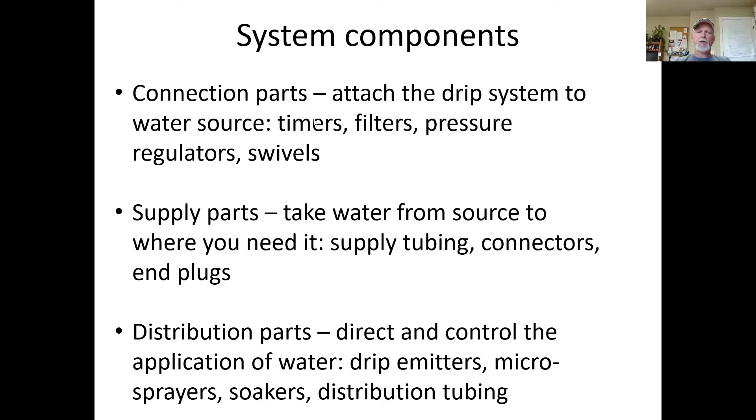So when you're doing your connection to your water source, there are some basic parts you just need to be kind of familiar with. You need some sort of a manual shutoff to give you ready control of the system if you need it. Typically, it's not ideal to hook it directly up to the hose bib without something, and it can be as simple as a standard manual shutoff, plastic or metal shutoff that just threads right onto your hose bib.

Ideally, you should use some form of filtration on a drip system because small particles can gum up the works and give you problems. On city water on a small system, you might potentially be able to get away with none, but we still generally recommend it. There's just a lot of stuff that happens to get into the systems that can foul up the little tiny emitters on the far end, and then you don't realize something's not working right.

For most types of application, 150 micron filters work fine, and you can get filters that are designed to hook right up to the standard hose thread connection. If you're doing super low flow parts, like if you're doing a lot of the pre-emitted 1/4 inch soaker with really, really small emission points, you might want to go up to a 200 micron filter just to make sure. Or if you have a well that is notably sedimenty, you might want to put up a 200 micron filter just to ensure less problems. So the larger the number, the smaller the filter holes, the less stuff gets through.

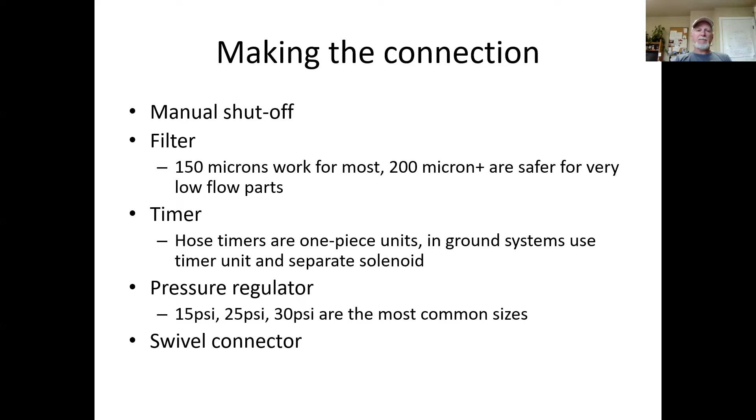And then once you've got all those connection pieces on, you need the actual connector, usually the swivel connector for a hose attached system, that converts from a standard threaded hose fixture like you're used to off of a hose or hose bib to a compression fitting that actually supplies the water to the 1/2-inch supply line. It does matter what order you are putting these components together in.

Typically, the first thing you want, of course, is your manual shut off. That gives you the ability to readily control the water, even without turning on and off the actual hose bib itself. Even in-ground systems on fancy timers that are PVC solenoid and then a pop-up to get out, still have a manual shut off in case you need to, for example, work on the system. You don't want to go all the way back and drain the whole system out and shut it all off back at the street. So good idea to have one of those on. It's the first part of your attachment sequence.

The next part usually is your filter, because even the timers might have small parts that could fail if they get too much debris in them. Filter will simply protect the system from debris and fouling. Then your timer, if you're using one. The reason the timer goes next is kind of important. The pressure regulator comes after the timer.

And if you were to set up your system to where your pressure regulator came first and then your timer, you could have that pressure regulator fail. They're not designed to have a constant pressure against them the whole time, which is what happens when you have an on system. Anything behind the timer is constantly on at full hose pressure. If you put the pressure regulator before the timer, then usually within a couple of months, your pressure regulator starts leaking because it doesn't handle that pressure. It's not designed for that constant pressure against it all the time like that.

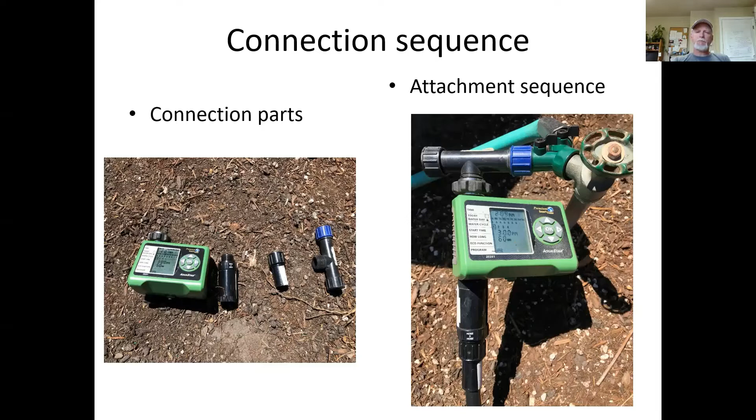So once you've got your connection made, now you need to get the water from the connection point out in the vicinity of the plants you want watered. And to do this, we use supply tubing. They usually call this half-inch tubing. That's a complete misnomer. In fact, if you go around and hit several different stores and look at several different brands, you'll see that there's actually a whole batch of different sized, quote unquote, half-inch tubing.

The most common dimensions: there's a little bit of actual true half, which is much smaller than you think. There's a lot of 0.620 inch and a lot of 0.7 inch. They call it 700 tube and 600 tube colloquially. The important thing is not for me to say, this is the size you need. The important thing is when you are buying system components, make a note of what kind of supply tubing, half-inch tubing, you are buying. Because parts from one will not fit parts of the other.

You can usually find parts for most of the common sizes out there if you do a little shopping around, but you can't go to a store, get a half-inch compression fitting and expect it to be usable on all the 4 or 5 or 6 different sizes that are commonly available. So make a note of that. 700 tubing is common, 620 tubing is common. Most other sizes are uncommon, but they do exist, they are out there.

It's important to understand that once we put that pressure regulator on, we have really changed the dynamics of water flow in the system. So once you have put that pressure regulator on, you have only so much footage of this half-inch supply tubing that you can run before the friction loss has pretty well balanced out any usable pressure in the system. The more times you put a T in it to split it off, and the more times you put an elbow in it to make a sharp right-hand turn, the less footage you can safely use, because that again affects the available pressure and water flow in the system.

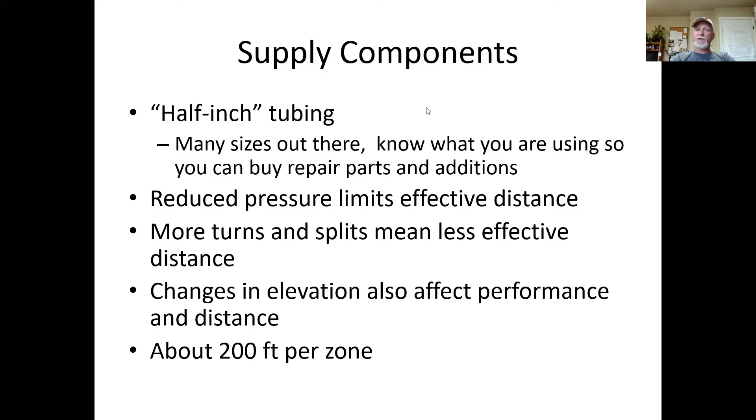So to maximize the efficiency of your supply components, try to avoid making right-hand turns. And if you're going up over the wall into a raised bed, or if you're going up a post to a deck rail and then going to go lateral, those pretty much have to be right-hand turns. You don't want loose, floppy tubing making those connections.

There are situations where you're coming around a house and maybe your pathway is right there at the corner of a house and you only have a few inches to make that. You probably are going to want to put an elbow on that to make that right-hand turn. There's reasons you have to do that sometimes, but the more you can avoid it, the better.

The trade-off to that is you can make a sharp enough slow curving turn to cause a crimp in that tubing. When you try to turn too far too fast, the tubing will actually crimp. It'll create a kind of a crease in it, and it'll fold over, and water no longer goes past that crease. And that obviously makes the system not work. So it's a balancing act. Where possible, slow curving turns. Where you have to, make right-hand turns, but try to avoid it.

When you're laying out a system, don't expect to stretch that tubing tight and nail it down to the ground with staples or anything of the sort. When water comes into a system that has air in it, and where there's very small release points, we get what we call a water hammer effect. And so that water surging through that system with the air trapped in it is going to create this knocking and shifting around.

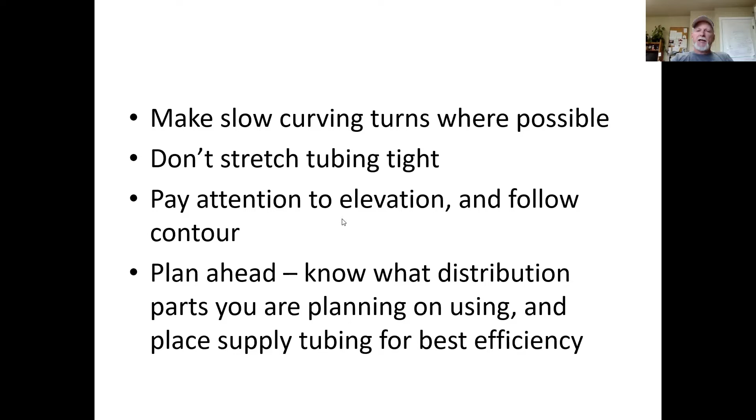So when it comes to distributing the water, actually applying the water, there's a whole batch of different ways you can get there from here. Basically, we break them down into 2 types of distribution parts. Low flow distribution components are things like individual drip emitters. They'll have flow rates of like 1/2 gallon per hour, 1 gallon per hour, maybe 2 gallons per hour.

Other components are high flow. These can be higher flow soakers. Some soakers are actually sprayer soakers or weep through soakers over a large area that take a fair amount of water. Others might be actual spray devices, which will have a rating of maybe 10 or 15 or even as much as 20 gallons per hour for the emission head.

So these are all useful components, but they shouldn't be mixed on the same timer zone. And yes, I know there are ways around it if you know what you're doing to sometimes make it kind of work. But generally, you should have separate zones for things that you're going to run on individual point source drippers or pre-emitted 1/4 inch soakers, because they're low flow devices. They're designed to run for long periods of time.

Higher flow devices run for shorter periods of time on purpose. And if you try to mix the two, you're going to do one of 2 things. You're going to dramatically underwater your point source emitters, or you're going to create standing water and runoff through your high flow emitters if you're trying to do both on the same system. So just plan a separate system for low flow stuff, a separate system for individual high flow situations.

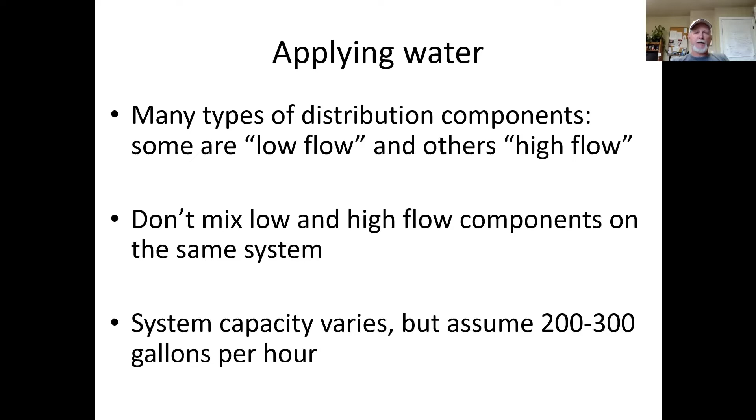The overall capacity in your system is somewhat variable. There's a variety of things that impact that, but you can generally assume that in a given zone, after pressure regulator at 25 or 30 PSI, you probably have something between 200 and 300, maybe at most 350 gallons per hour available. That becomes important with high flow components in particular. Even if you can fit as much tubing as you want to get where you want to go, if you're doing a lot of high flow components, you're rapidly going to run out of available water in that zone. So you may need to do multiple zones to make it work.

And it's an understanding that that is designed to water in basically a downward funnel-shaped pattern. If you're getting an inch of emitted water visible on the soil surface, when you get down there at 12 inches under the soil, that could be 1.5 feet or even 2 feet in diameter, depending on your soil profile and how much water you're actually putting into it. So it's watering a much bigger area and with much more water than you think. It's just going down. It's not sitting there on the soil surface, wetting the soil surface.

That's not to say that you don't necessarily need more flow or more emitters. Large plants, particularly plants with larger horizontal root systems rather than deep root systems, often need more than one emitter, because if you water a 2-foot circle over here, and the roots are 7 feet across, like on a big rhody, only one small section of the plant is actually getting water.

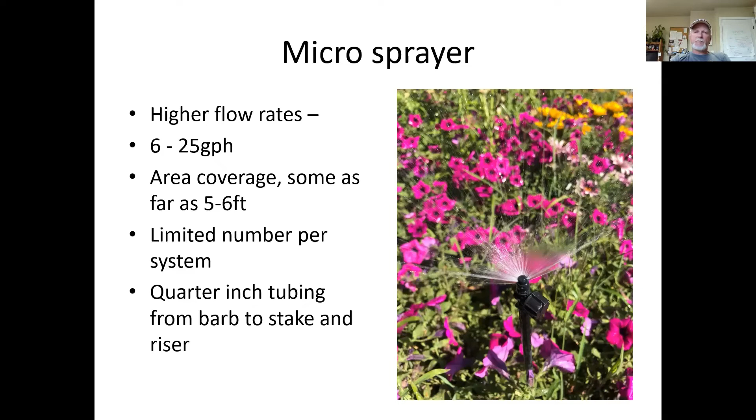Aluminum staples help hold tubing in the ground. It's going to be used for both 1/2 inch tubing and 1/4 inch distribution tubing. It just simply enables you to keep that tubing about where you want it, so it's not getting tripped over all the time or getting shifted by even passing animals or whatever, and no longer putting the water where you want it.

Shutoff valves are also available in both 1/2 inch and 1/4 inch components. This might be useful if there's parts of your system that you want to run seasonally, but the rest of it you want to run more frequently. And it simply enables you to turn part of the system off while the rest of the system continues to work on its regular timing.

Hole punches are in between essential and optional. You can do other means of attaching your drip components into your 1/2 inch tubing, but the hole punches are really well designed for doing that, and we'll demonstrate that here in a second.

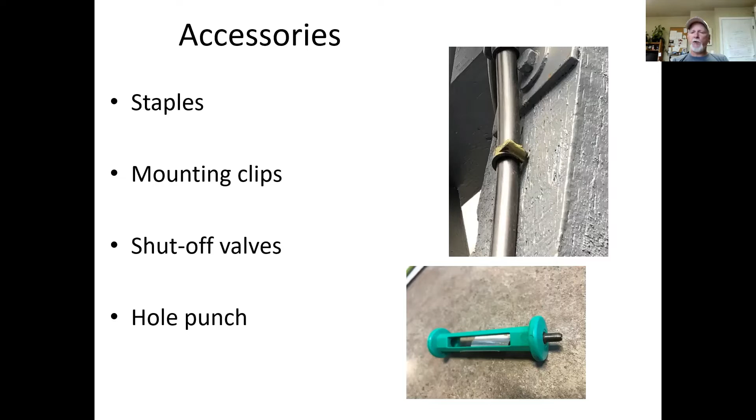Okay, we'll talk a little bit more now about layout and how this works, and then we'll go into showing the actual attachment sequences. I like to use what we call the 200-200 rule, and as I said a little while ago, it's a very conservative number. We assume you have about 200 linear feet of available tubing and about 200 gallons per hour of available water. You actually, in almost every system, will have more than that. That's a very conservative estimate.

Keep in mind that this is all measured after the pressure regulator. What happens after the pressure regulator is much more impactful on how the system works than what happens before. So for an example, a lot of my zones at home, I may not run 1/2 inch tubing all the way back to the hose bib at the house. Instead, I'll run a traditional garden hose out to the shut off and timer. So I've got 50 feet of garden hose at full pressure before I start my supply and distribution lines out there in the garden.

So this simply enables me to save that extra water loss I would have running that extra 50 feet of tubing, so I can have more tubing on the zones out there. So after the pressure regulator, that's when you start measuring that 200 as far as available feet.

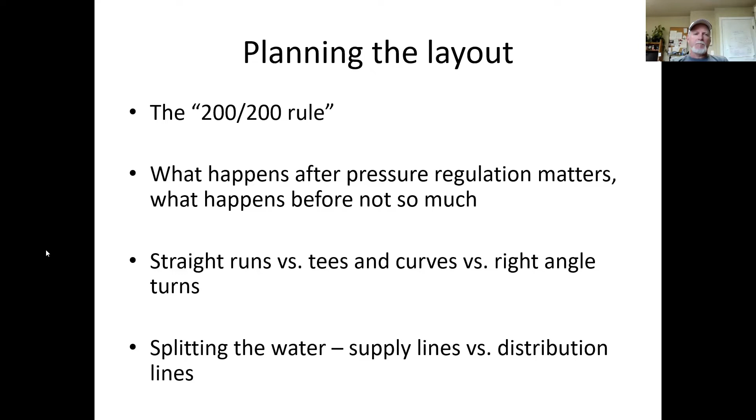So we talked a little bit about this. Running the supply line as close to the distribution points as is practical. So you want to run your half-inch tubing relatively near where you want the water to come out, because you don't want to have long runs of quarter-inch tubing. They're even more restrictive than the half-inch itself is.

A good rule of thumb is about 3 feet. If you can get within about 3 feet, you don't need to take special precautions to get enough water out. You can just put your drippers right into the half-inch tube and use your quarter-inch to go to where you want the water to release. If you're exceeding 3 feet, you really have to do the barbing, the unregulated barb to the tubing, to the emitter, or you're no longer getting your listed 1 or 2 gallons per hour. You'll still get some water often enough, but it may not be as much as you think.

Slope is kind of a special case. Generally speaking, you want to run your supply lines on contour. You don't want to run your half-inch up and down within its distribution area. It's okay to run half-inch up a post, up to a deck rail, put a T in, and then run your whole deck rail at the same elevation, because that's where all your distribution is coming out.

But if you were to then put a quarter-inch in there at the bottom of that to water some plants down along the footing of the patio, they'll get more water because there's more water pressure than the top stuff will. So it's something you need to keep in mind. But generally speaking, follow the contour as best you can. The emitters we use, the drip emitters, are pressure compensating within reasonable limits. Usually anything over about 5 psi they'll correct for.

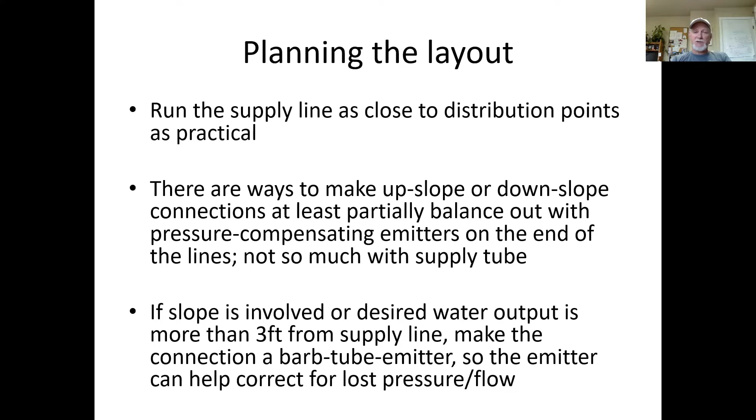So I'll talk a little bit about making connections here. This is where people get a little bit confused about how it should go, how it works and how to make it work. There's a lot of different types of compression fitting out there for half-inch. Most of them are just fine. Some of them are easier to use than others. I'll show you the types we sell, but there are other types out there that are just as good for making the connection.

So making a cut in a half-inch tube. They make fancy cutters, tubing cutters that are designed specifically for that. I would love to sell you tubing cutters, and that's fine. You don't have to have them. Regular hand pruners actually cut through this tubing very, very nicely. And that's usually what I end up using at home because I always have one at hand. You want to make your cut as relatively square as possible. You can be a little off. It's not really going to impact much.

Nice square cut. If you are heavily slanted, like that, your compression fitting may not fully engage. It may leak or it may come apart because it's not catching fully. So square cuts. Compression fittings go on a bit hard on purpose. You should be having to work at it. If it just slides right on, you probably have the wrong size component for the tubing you're using.

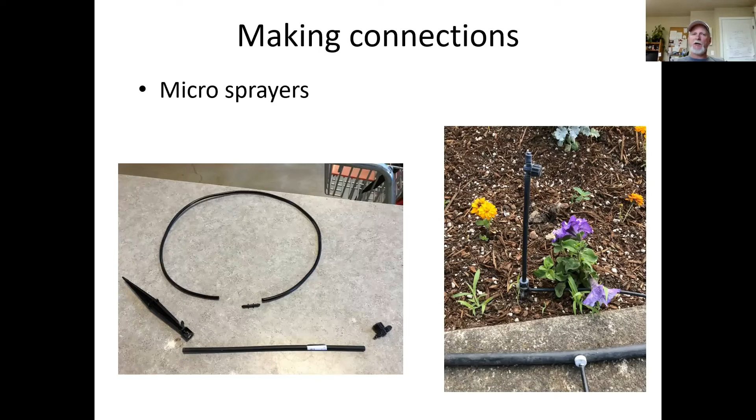Dripper line is very similar. If you need your dripper line to start right at your 1/2 inch, it's golden. You simply put your barb in, you start with your dripper line, and you keep running it as far as you intend to run it and as far as it will allow. In most cases, that's simply not going to be the case, and you're going to need to create at least a little interim space of basic distribution tubing. So you put an unregulated barb into your 1/2 inch, you run straight distribution tubing with no emitters or holes in it to where you want to start your soaker line. And there you can put in a T to make a collar, or you can put in another barb just to start a straight line of the soaker tube.

If you do not make a circle with the dripper line or the soaker tube, water keeps coming out the end and you're not releasing it where you want it. You'll need to end that. And we just simply use a goof plug to stop that line, so the water will then come out of the emission points rather than out the end.

So, common questions we get when we're getting started on drip systems. How big of emitters should I be using? How many emitters should I be using? Well, we talked about the system limitations, 200 to 300 gallons per hour max. And typically, if you're using point source emitters, you can really maximize that. If you're using micro sprayers, you better give yourself some cushion. There's things that interfere. A good rule of thumb is for any given zone, figure out for the plants that you're watering relative thirst and need. If you take your average plants and give them 1, or in some cases on bigger plants more, 1 gallon per hour emitters, then you can make thirstier plants get a 2 gallon per hour emitter, and more drought tolerant plants get a 1/2 gallon per hour emitter, and kind of regulate your system that way. So they'll all run the same time, getting slightly different amounts of water.